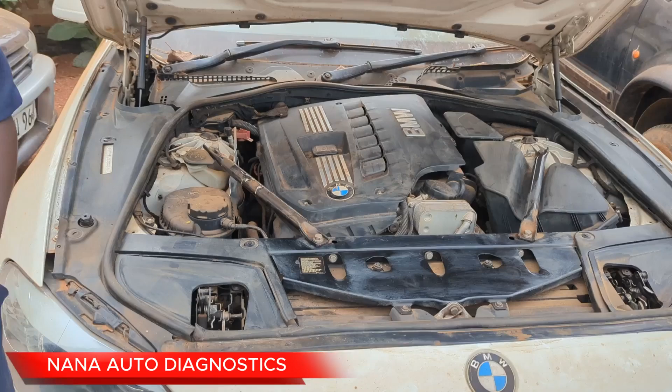Is your engine stalling or having a rough idle? The culprit may be the MAF sensor. In this video, we are going to talk about how the MAF sensor operates, and then we shall go ahead and carry out diagnosis on the sensor. The MAF sensor is usually located between the air filter and the throttle body.

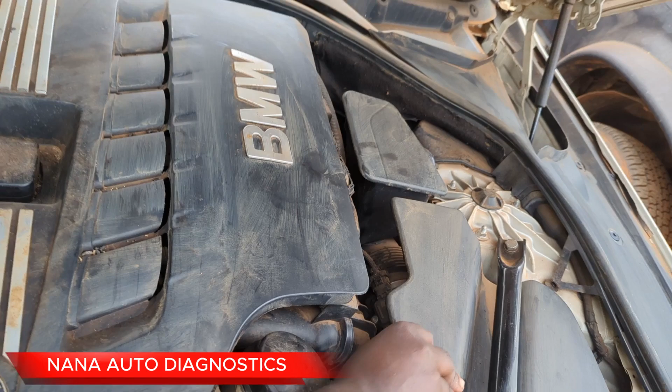So let's go ahead and describe how the MAF sensor operates. Then we shall come back and carry out diagnosis on the sensor.

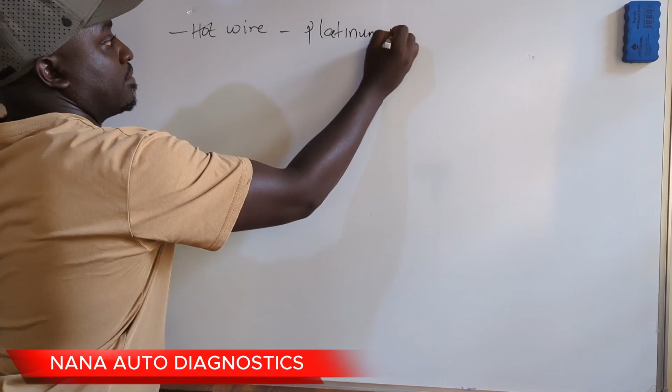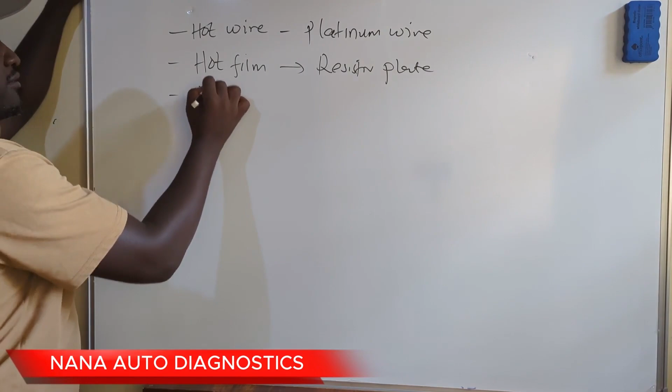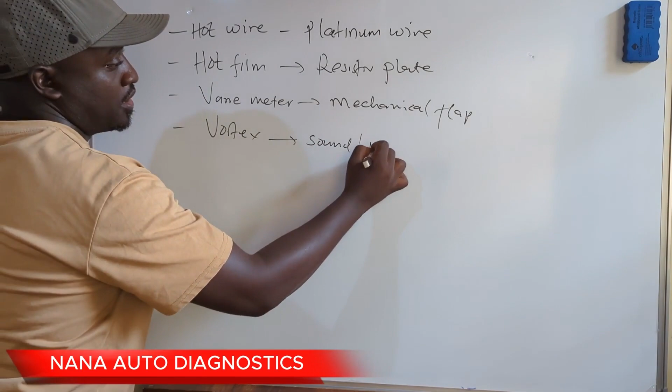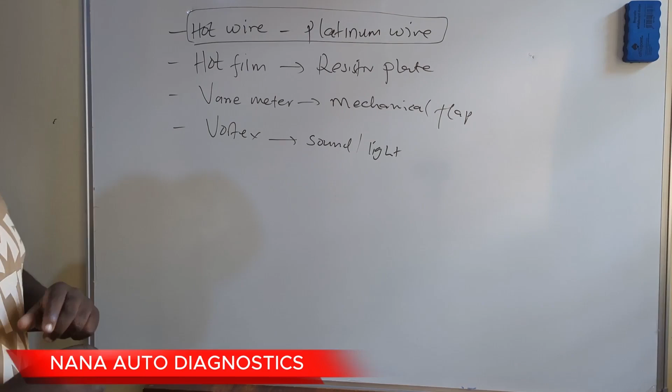Before we can carry out diagnosis on the MAF sensor, let's gain some understanding about its operation. The MAF sensor comes in different types. One of them is the hot wire MAF sensor, which consists of a platinum wire. We also have the hot film, which consists of a resistor plate. We also have the vane meter, which consists of a mechanical flap. We also have the vortex type, which employs sound waves, and it may also employ light. But in our discussion today, we shall focus on the hot wire because it's the most common. Let's dive right into it and see how it operates.

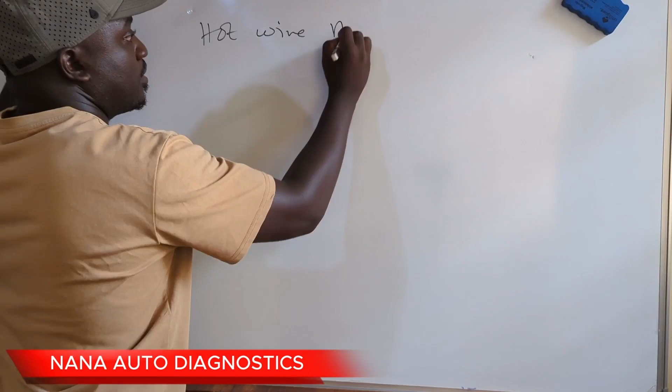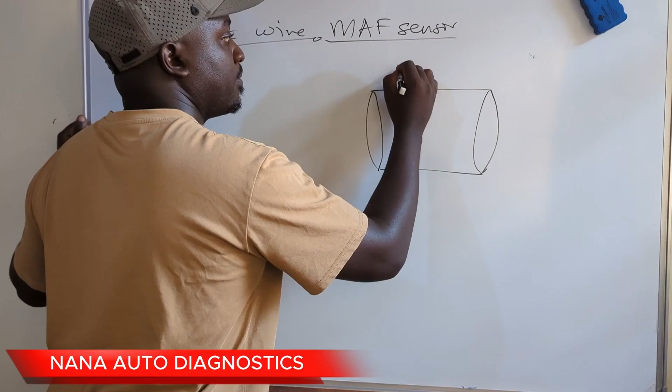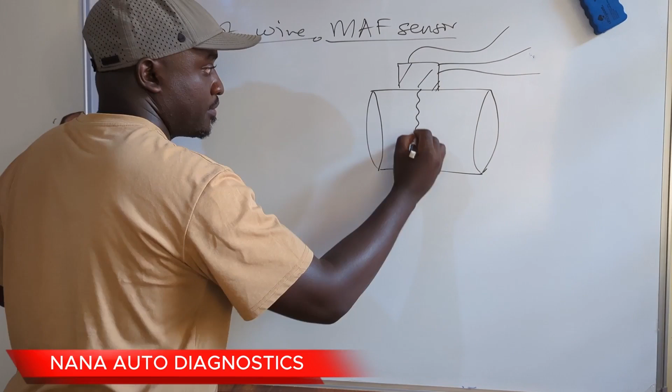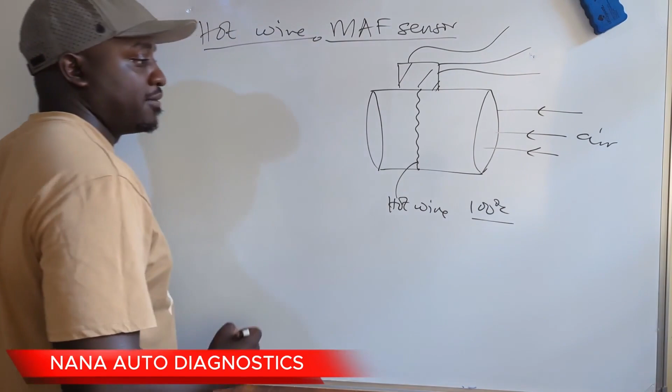Let's go ahead and explain how the MAF sensor operates. So this is our hot wire. This wire is kept at a constant temperature, say about 100 degrees Celsius above ambient temperature. Whenever cold air blows over the hot wire, its temperature will reduce, say to about 80 degrees Celsius. These values are just used for illustration purposes.

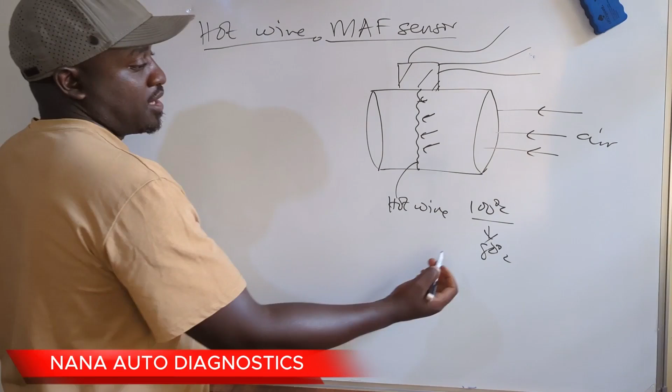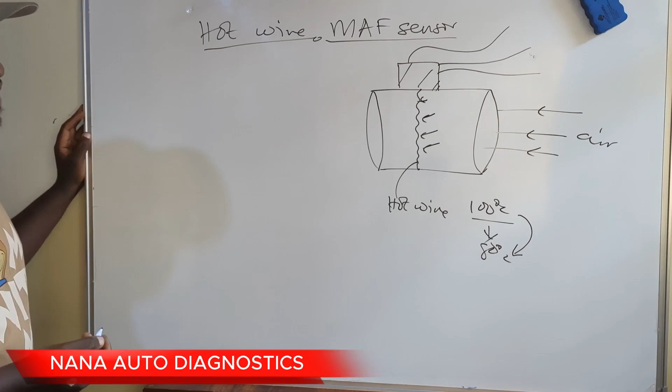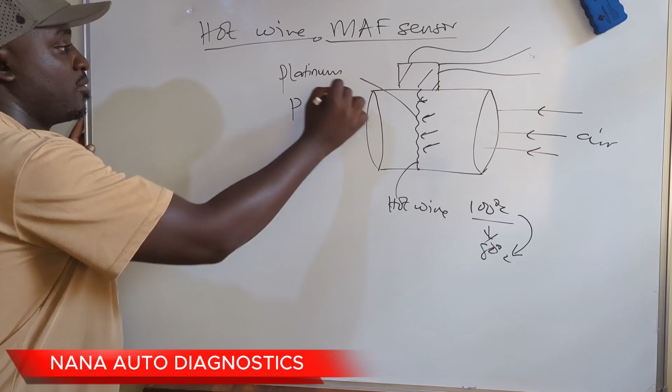So whenever the temperature decreases as a result of air blowing over the hot wire, the ECU has to increase the temperature of this wire. How is that achieved? This wire is made up of platinum, and platinum has a positive temperature coefficient. In other words, its resistance increases with increasing temperature, and its resistance decreases with decrease in temperature.

So if we employ Ohm's law here, V equals IR, so I equals V over R. When cold air blows over this hot wire, its temperature is going to reduce. As the temperature reduces, the resistance will also decrease. So we're saying the temperature is going to reduce, and as a result, the resistance is also going to reduce.

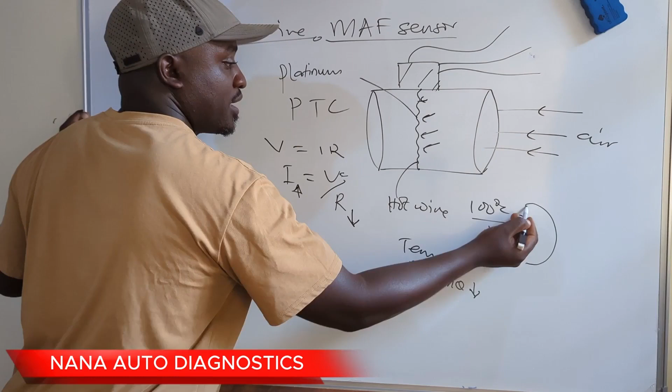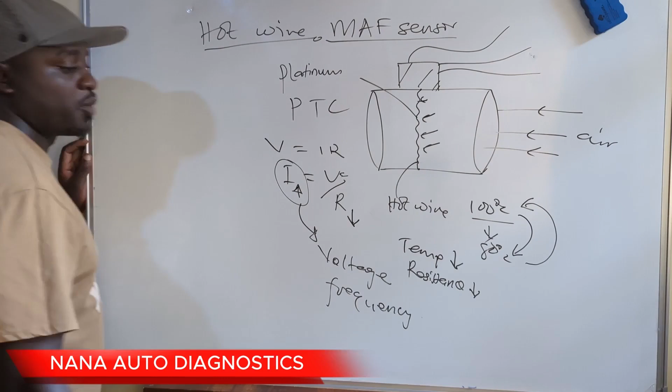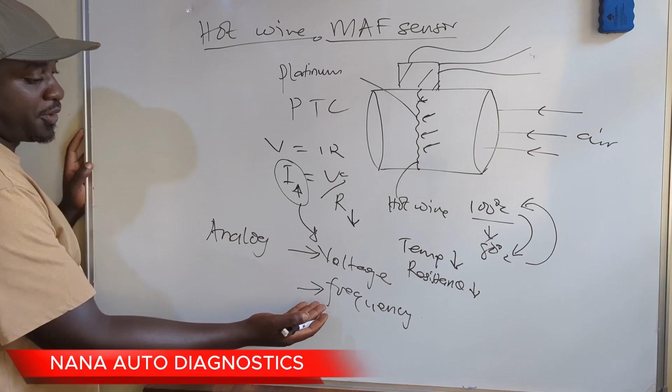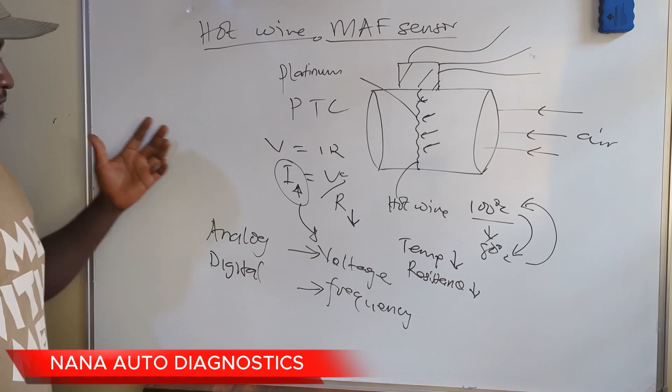So if this resistance decreases, what happens? If we are to keep the temperature value constant, the current supplied must increase in order to restore the original temperature. So the amount of current required to bring back the temperature of this hot wire to its initial value is converted to its equivalent in either voltage or frequency. If converted to voltage, this gives rise to an analog signal, and if converted to frequency, it results in a digital signal.

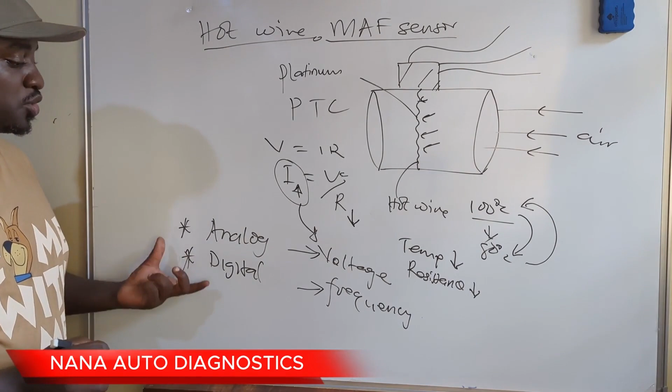Now, the MAF sensor may give either an analog or digital signal, and the way we test for this is totally different, and the tools we use are also different, because if you are to carry out diagnosis on a digital MAF, the best equipment used would be an oscilloscope, and we shall see that later on.

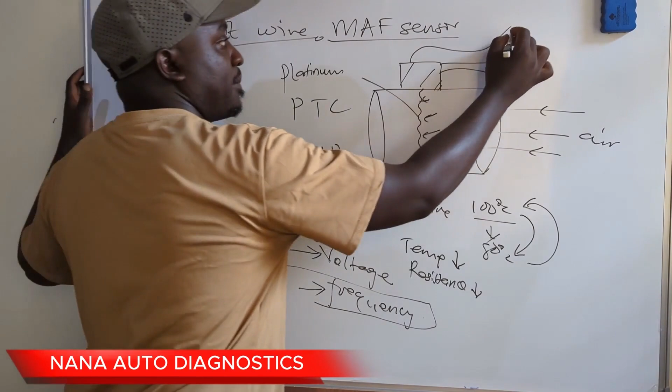Now let's go ahead and explain the wires usually found on the MAF sensor. The MAF sensor mainly has 3 wires. One of them is the power supply, another one is the ground, and another one is the signal wire.

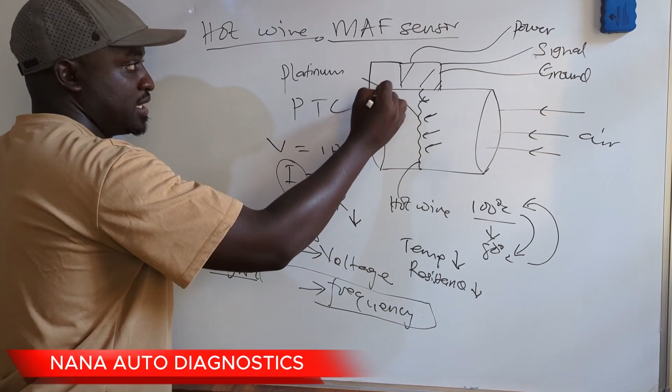In case you find the MAF sensor having 5 wires, the other 2 are usually for the intake air temperature sensor, sometimes combined together. So if you check your MAF sensor and find 5 wires, 2 are for the intake air temperature sensor and 3 are for the MAF sensor. It's always advised to check your wiring diagram to see which color codes correspond to the MAF sensor.

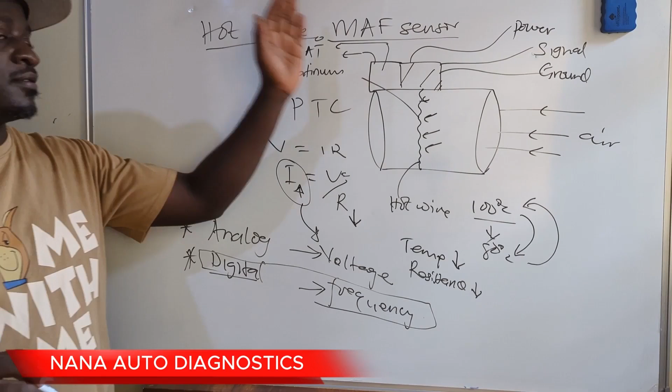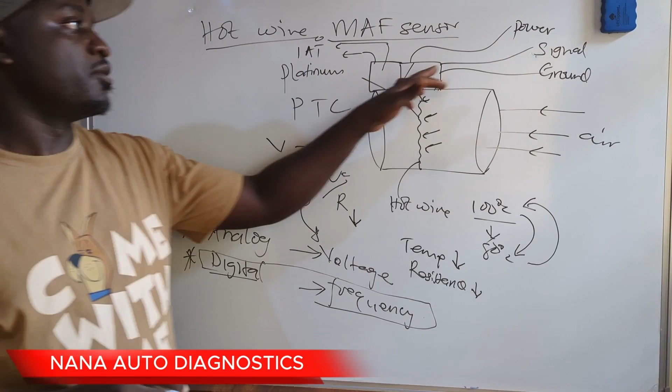Now that we have established how the MAF sensor operates, let's go ahead and explain how this signal obtained from the MAF sensor is used by the PCM or the ECM.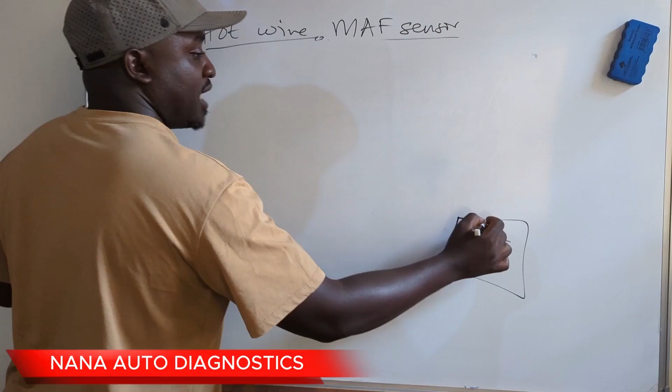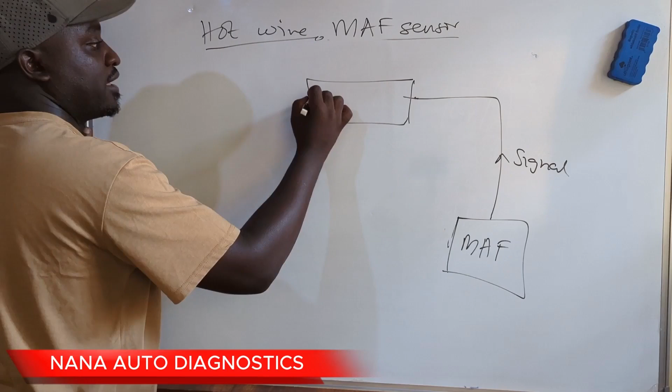So we have our MAF sensor here, and this is our signal wire that is connected to either the ECM or PCM.

Now what's the difference between these two? Whenever you find a car having PCM, this is the powertrain control module. The PCM is a combination of the engine control module, which is ECM, and the TCM, the transmission control module. So you can't find a car having ECM and PCM at the same time. It will either have ECM and TCM, or PCM.

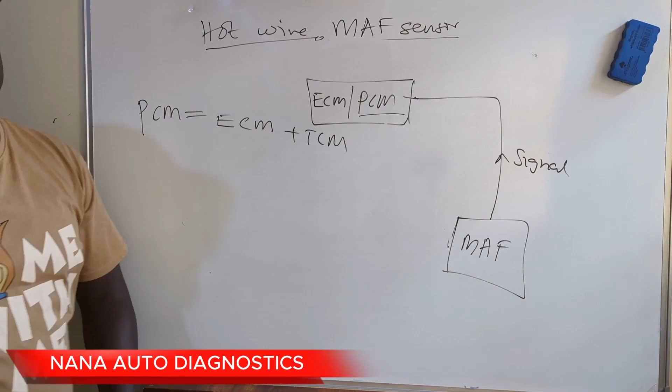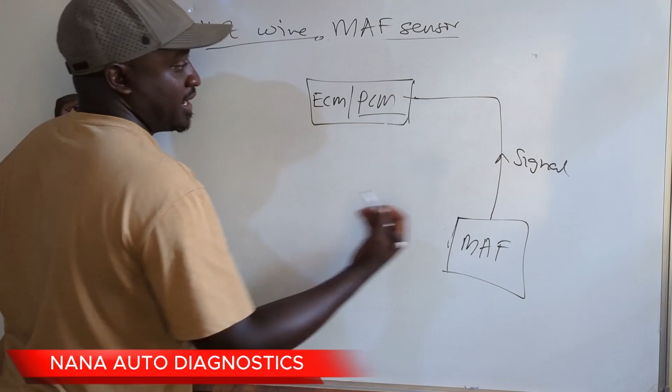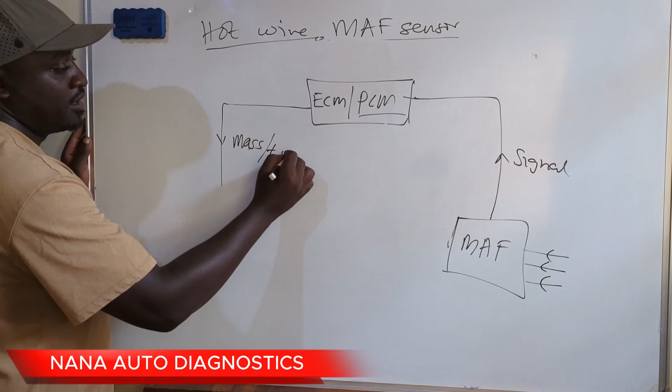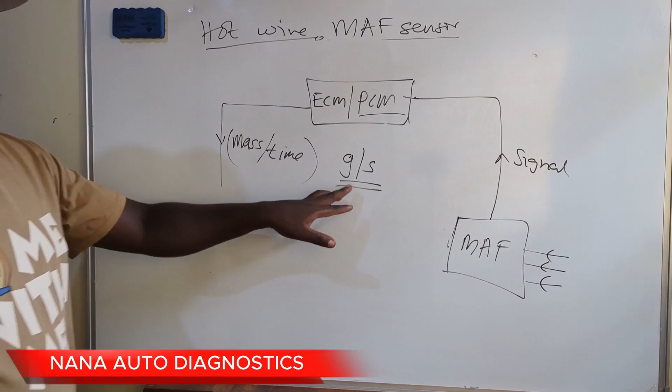Now this data obtained from the MAF sensor is utilized by the PCM to calculate the mass of air that is flowing past that wire in a given time period. This is what we obtain as grams per second. When you check your scan tool and obtain the PID for the mass airflow sensor, the units will always be grams per second to indicate the rate of flow of air.

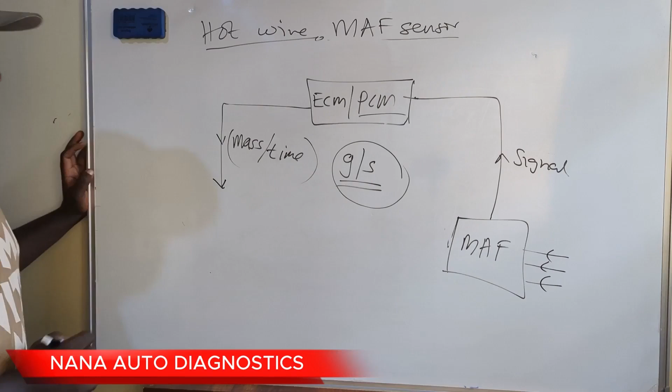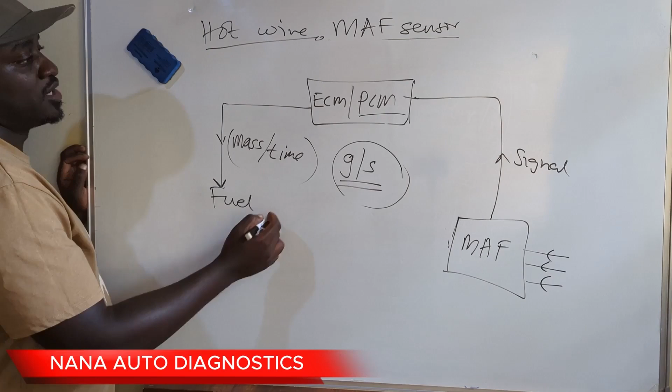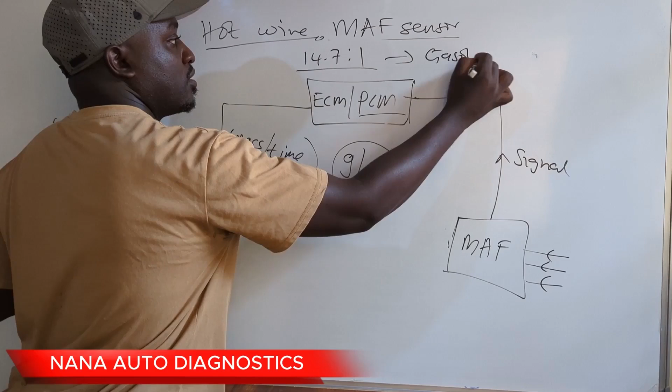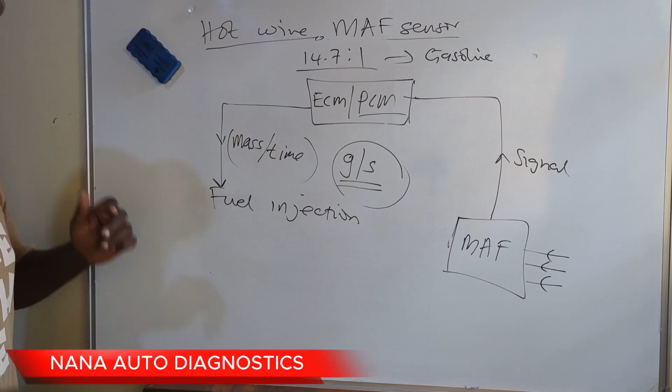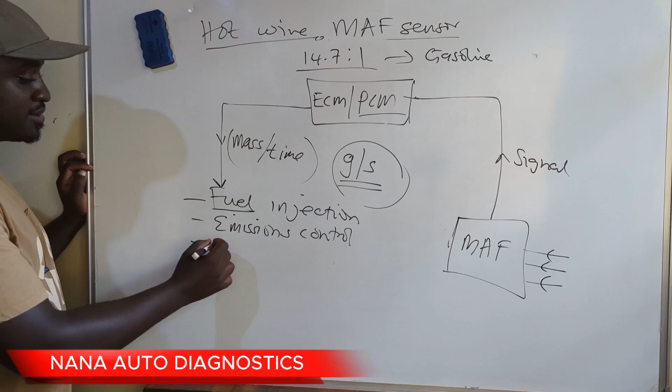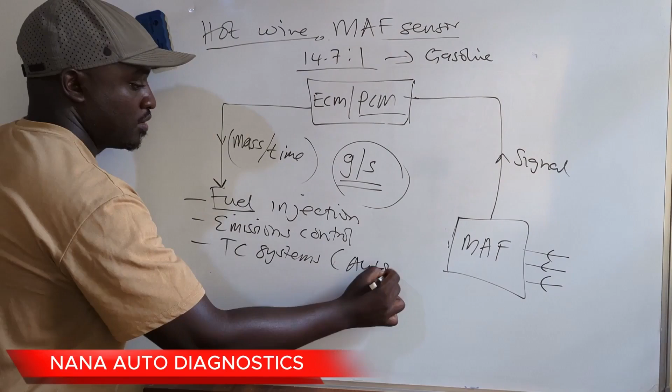And this plays an important role when it comes to emissions control. The same data is used in transmission control systems for easy transitions of gears, especially in automatic cars. Now that we have gained some understanding about how the MAF sensor operates, let's go ahead and see how we can carry out diagnosis in case we have faults or codes reporting the MAF sensor.